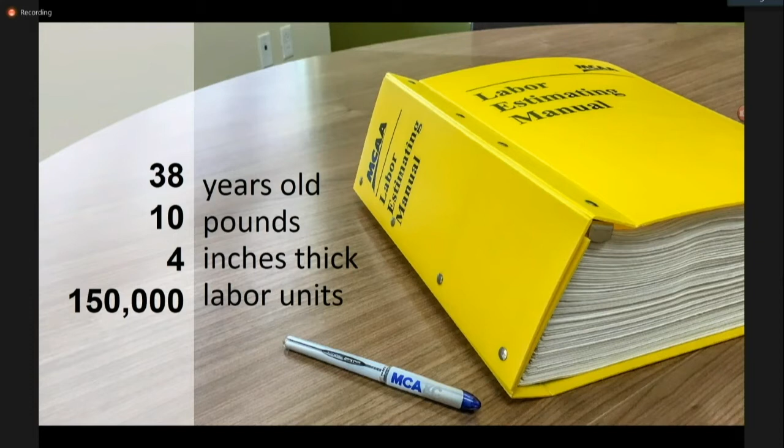The idea to form this labor estimating manual was discussed at the MCAA convention in Los Angeles back in 1968 by the board of directors. Then in 1970, two years later, the first edition of that yellow book was published. So by the end of its publication, it was 38 years old.

Today, what we have is the new WebLEM, which is internet-based. The big yellow book never gets updated any further, so if you see one sitting on somebody's shelf, it certainly isn't up to date. The new way is on the website, the WebLEM itself.

Okay, so a couple of significant changes we've made. We're now making sure there's a very robust credentialing process to protect MCAA's IP. Each of the companies now has an administrator within their company who is given a password, and they go in as an administrator and set up what would be a shared account. So your administrator within your company is the one who administrates the passwords and passes them out or sends them out to those of you in your company.

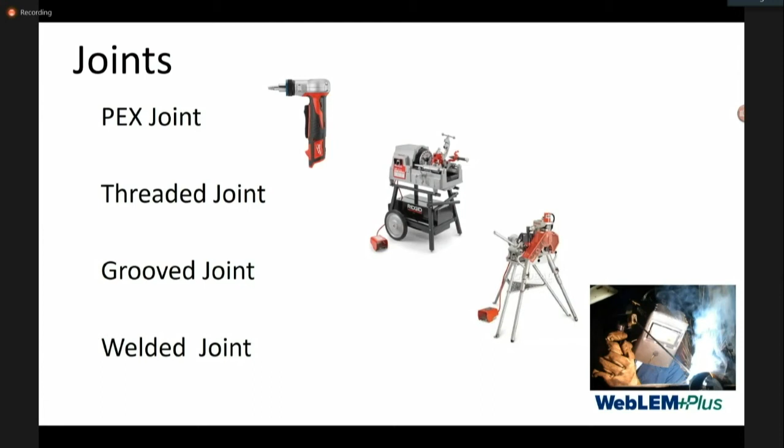If you have a different type of material that you're using that we may not have in the WebLEM, that would be a way that you could get the request to us. That goes out to Nick Pouffard from the MCAA, and then he can get that out to one of the committee members, and we'd get on that request.

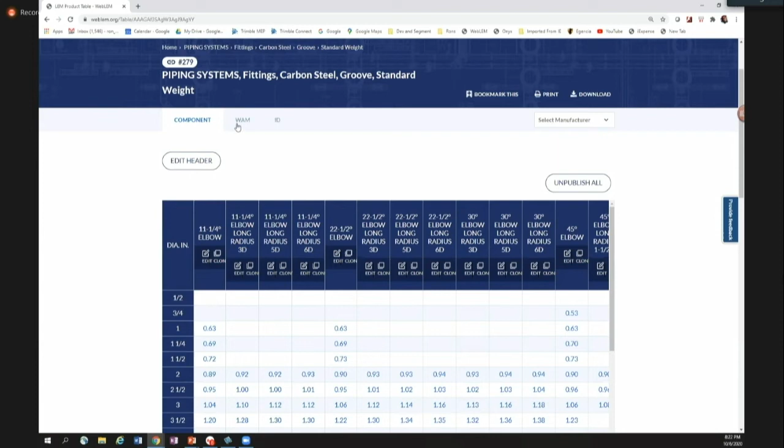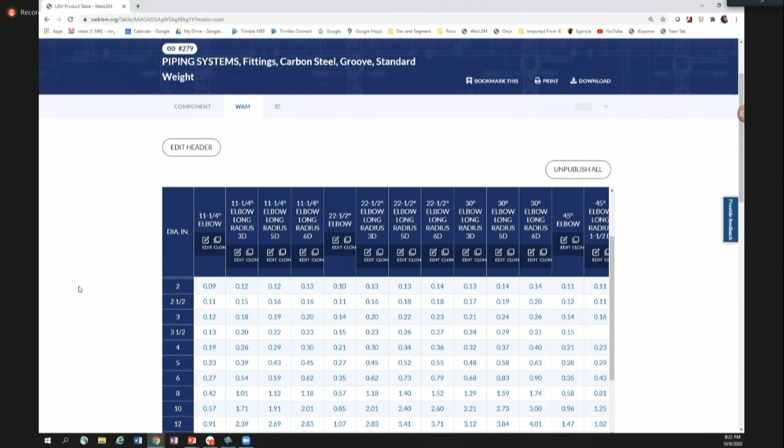Whereas the work activity method, I'll click on it, is broken down into each individual task. For this, what we're looking at here, obviously these numbers are much smaller because that's just the installation time for this particular item. So an 11¼ degree, 90 degree, or 11¼ degree elbow, 2-inch in size, has an installation time of 0.09 hours. Then the last tab across the top is an ID tab.

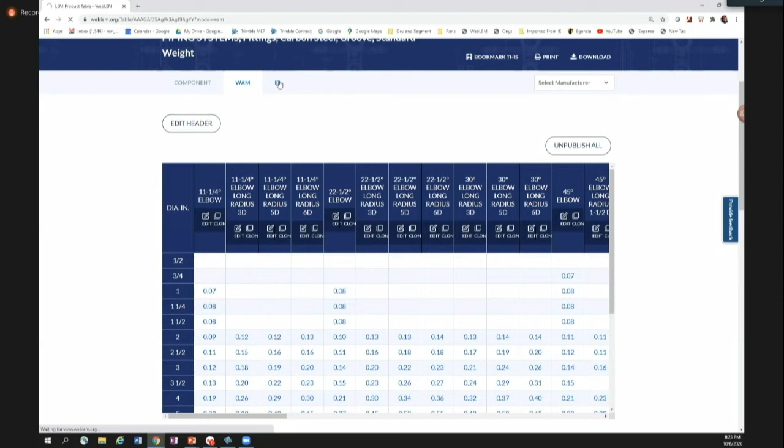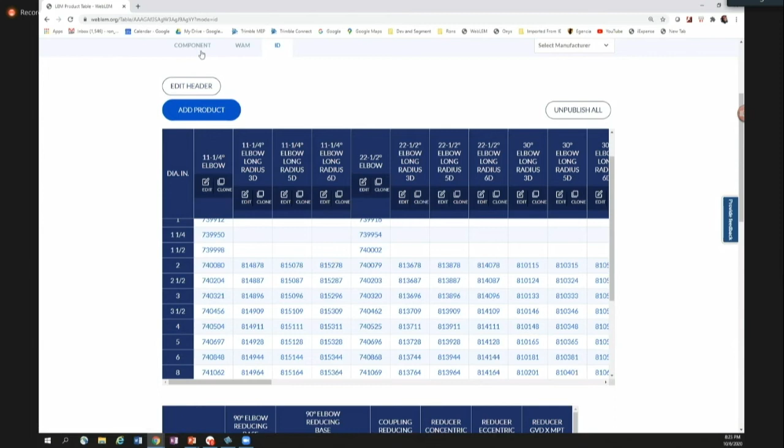So now MCAA has released or revealed the code behind the numbers, and this is what the software companies will use in order to update labor units into the software systems. So those are the 3 new tabs across the top: the component method, the work activity method, and then that MCAA identifier method.

Something else that's new is over here. If I wanted to look at manufacturer content, I would click on select manufacturer, and then every manufacturer who is participating in this would show up in this list.

Today, Victaulic is the only one. We are certainly encouraging other manufacturers to do this. We just rolled this out early this year, and the ones that we're onboarding first are going to be ones that are part of the MCAA Supplier Council.

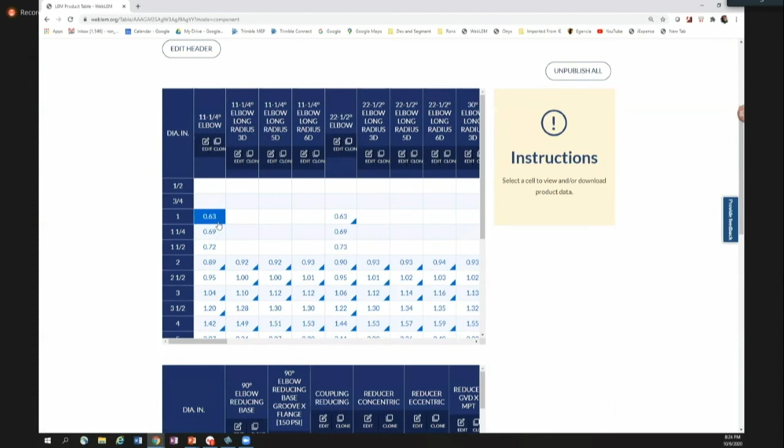So if I click on Victaulic, you'll notice that in the grid down below, anything that has a little blue triangle in the bottom of it means that it has some content behind it. So I'm going to click on that item.

And now when it comes up on the right-hand side, we'll see that we've got a couple different options. You have painted or galvanized. Let's say it's going to be painted. And now here is the information behind that. It gives the MCAA ID up here at the top, its size is 1-inch, and the manufacturer's Victaulic.

It gives a model number, the UPC code, the Harrison code, the trade service code, and the weight of that item. It gives a PNG - if I click on that, I'll get a PNG of that 11.25 degree fitting. I can also download the ITM associated with that from Victaulic, or the RFA associated with that.

I can also download the cut sheet or an O&M manual. So this is all something that's very new to the WebLEM, being able to have manufacturers put links to their content onto the website. I want to stress, it's not their content on the website, it's links to their content. That way, we as MCAA don't have to administer that content and keep it up to date - it's up to them to do so.

So that's some of the great things that we've changed to the table view here with the WebLEM. Now I'll switch back into that presentation.

Let me explain some of the differences and reasons why we did this. On the screen you'll see a spool right now that's got a bunch of back-to-back fittings. Back in 1968, when the WebLEM was in its inception, one of the things we didn't know as a committee is what they were going to attach that fitting to. So we had to take the approach that it was going to be attached to another fitting. In the case of a high line, there's not a whole lot of fitting density, but you get in a mechanical room and that fitting density increases dramatically.

A lot of times you can have back-to-back fittings, and we really didn't give the mechanical contractor a way to adjust for those. With the work activity method, you are only counting the number of welds or cuts that you actually need, and there is no extra fat.

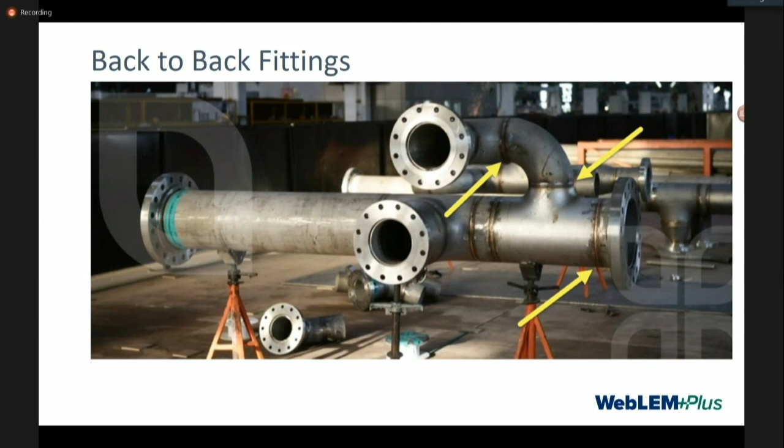So as you can see, you can hone the fat out to get to a much more exact number. But again, it is taking the fat out of the bid - there's no doubt about it. Okay, so what does that WAM offer?

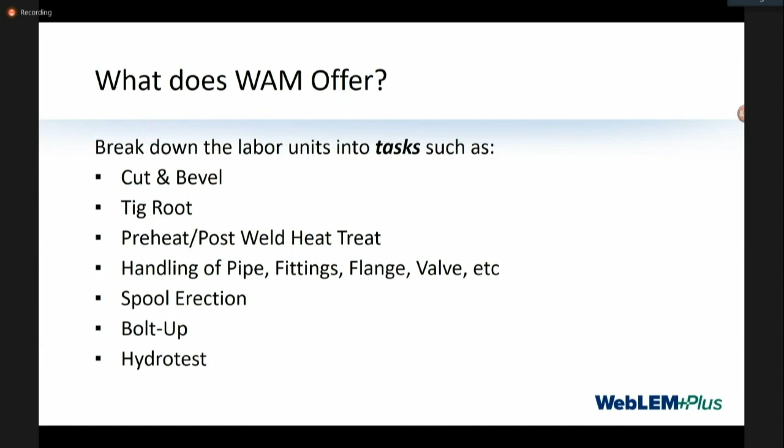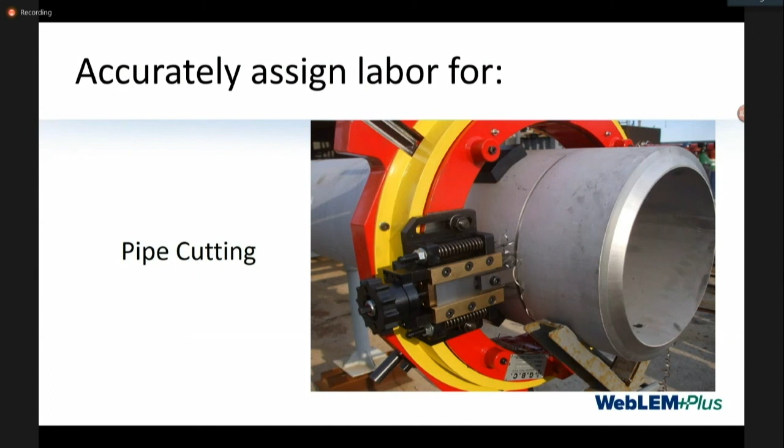It allows you to break down the labor units into tasks such as the cut and bevel, the TIG root, post-weld heat treat or preheat, handling of the pipe and fittings, the valves, flanges, spool erection, bolt up, hydro testing, all of these different categories and many more. It allows you to break it down. So if you want to find the labor unit just for pipe cutting, you can look that up. There's a labor unit associated just with that.

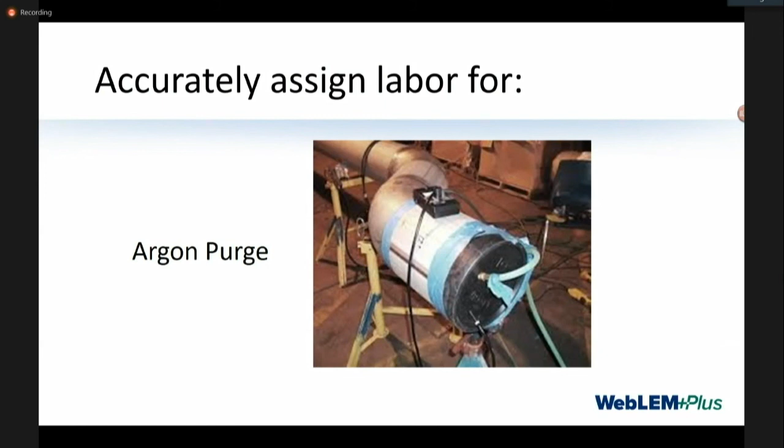Argon purge—if you need to have a purge based on whatever size it is, you can look up the purge number and add that into your estimate as well. If you need a TIG root adder, there's an adder for TIG root.

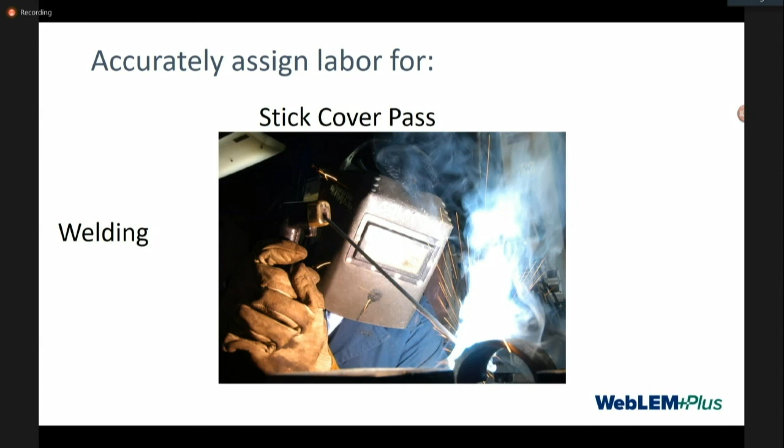When it comes to welding, all of the tables have a footnote at the bottom that talks about the welding process that is the basic assumption in which those labor units were formulated. They're all based on a stick process, because each shop has automation we don't know about. So everything's based on stick, and you'll use a performance factor to derate or adjust those labor units to be your own. If you happen to have a submerged arc machine, for example, or roto weld, you're going to be tweaking those numbers down, because it's a lot more efficient than a stick weld.

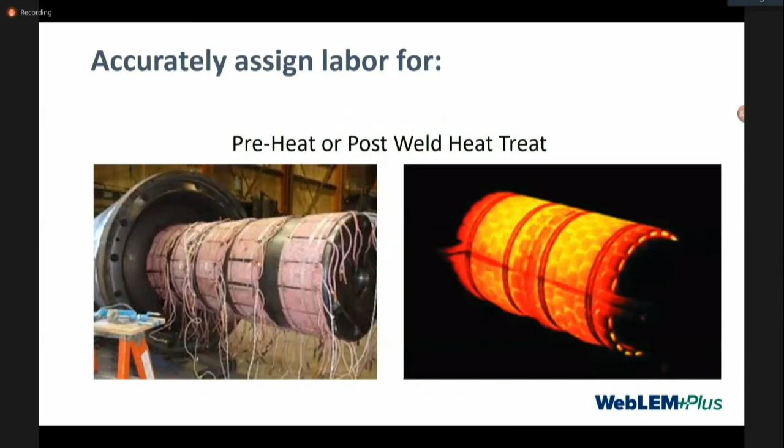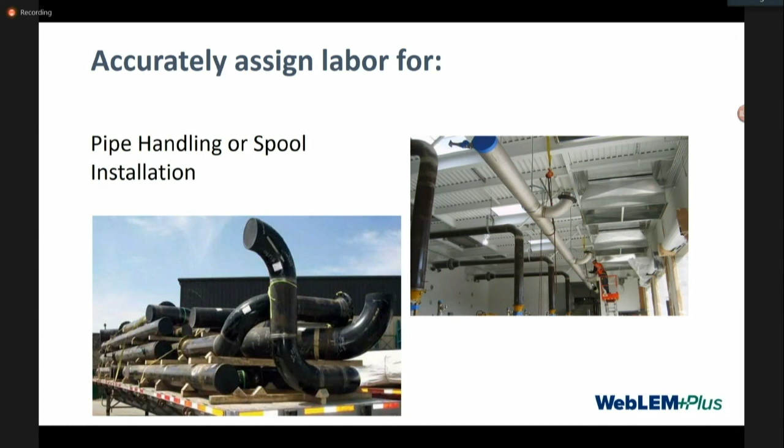We now have labor units for the preheat and post-weld heat treat processes, as I said before, pipe handling of the spools to get it loaded onto the truck. Then once it gets to the job site, the ability to figure out exactly how much labor hour-wise it's going to take in order to get that spool up and into place.

Bolt up has also been broken out. In the component method, the bolt up is included with the flange. So whenever you take off a flange in the component method, the old way, the bolt up is already buried in there. A lot of times that flanging bolt up has to happen once it hits the field, and may or may not happen in the fab shop. So now you have the ability to move that bolt up to the field and do it there.

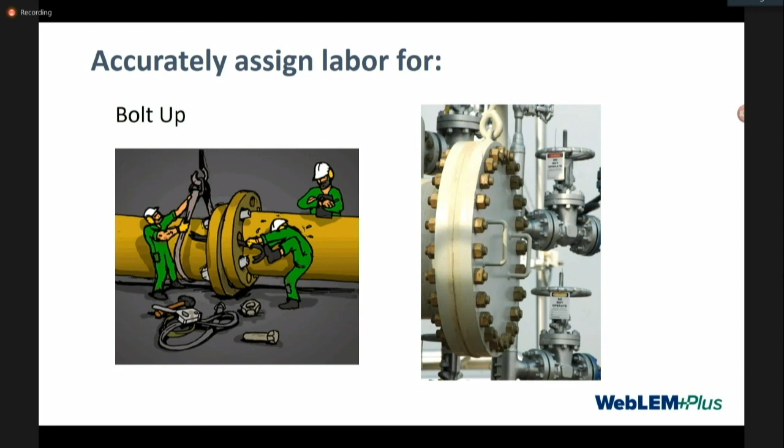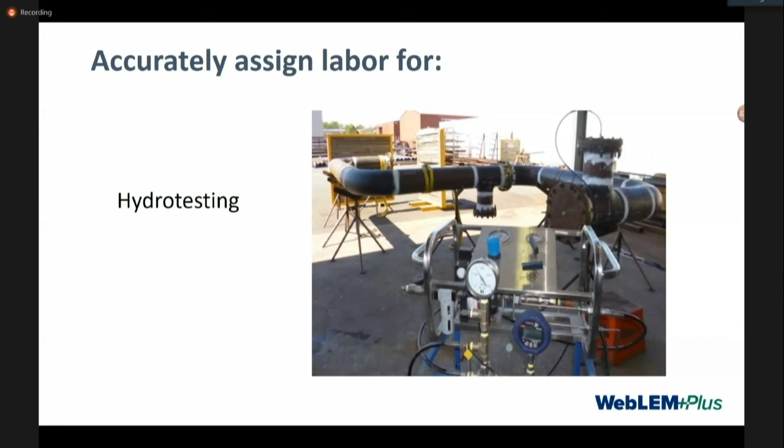Hydro testing—in the component method, we have 2% of that labor unit on all component method that is hydro testing. In the new work activity method, we've given you a variety of different ones to choose from, because at the end of the day, the 2% may not be enough. You may have a flange by flange spool—it's simple, put blinds on the end of it, pump it up, test it. What happens if it's flanged by welded in? What happens if it's welded in by welded in? We've given you a bunch of different examples and labor units so you can adjust, because we believe in a lot of situations that 2% just isn't enough.

So the WebLEM Plus, wrapping up, we believe that it's the most accurate and complete collection of labor units used within our industry. Make sure that you understand those basic assumptions for the labor units and apply any necessary labor correction or performance factors.